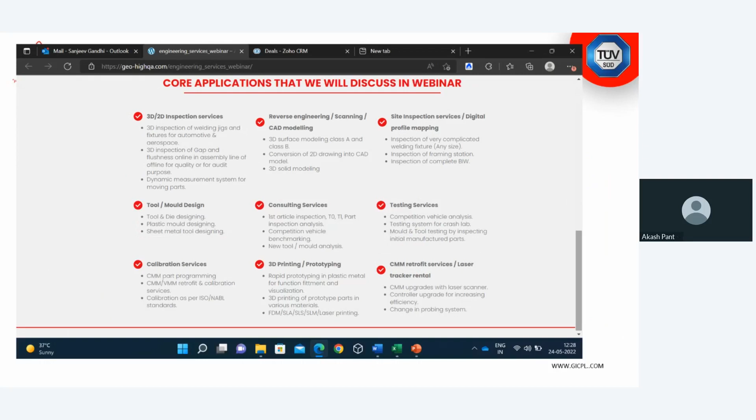Now let us come to the core. When we say technology, can we do these kind of things with the help of conventional methods? Answer is not at all. So these technologies come from, unfortunately or fortunately whatever word you want to use, not from India. This all comes from abroad.

When we talk about technology like vision system, we directly go to US - this is a company from US called MicroVu, almost 75 years old. When we talk about 3D scanner, we go to Germany, a very old company. When we talk about handheld scanner, we jump to Germany, Wenzel. When we talk about quality inspection system, another US company, High QA. Do not worry about too many technologies right now.

What I want to give as a message here is in these two slides - whatever engineering services we are doing with the help of these technologies. So we have vision systems, we have scanners, we have quality inspection systems, we have gap and flush measuring systems, we have seal gap measuring systems, we have laser trackers, we have portable arms, we have gear testing systems, we have another portable arm for medium size, we have surface metrology systems, we do have shop floor measuring systems, and last but not the least, something we are proud of - using all these technologies, we are making something in India which we call customized machines.

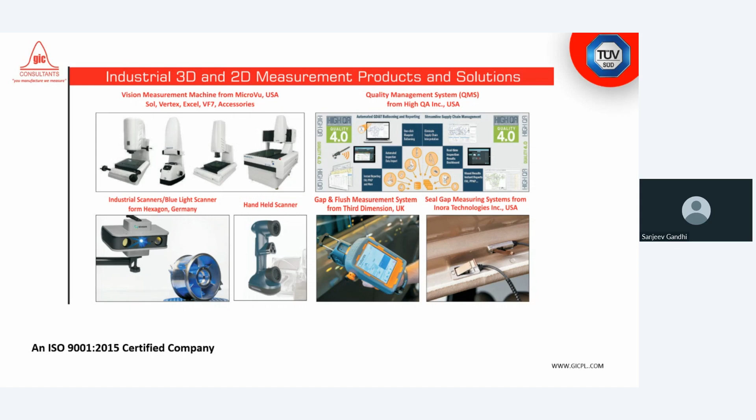Did we miss anything in these two slides? We are talking about portable, we are talking about tracker, we are talking about vision system, we are talking about surface metrology, gear testing. Did we miss anything? I will say geoinformatics is a one-stop solution, but still we are not having 100% solutions for every problem - this is an opportunity as well for us. We always aspire to give the solution for everything. But today, in today's scenario, we claim that at least 90 to 95% of your measurement can be done in-house, within our company.

I'm just now putting down all this equipment by name and by country, which we just spoke about. Again, do not worry too much, but keep this message in mind.

When you go to, let's say, a specialty hospital, let's say any hospital, there you do not go only for simple things. There you go for complicated challenges. Same with geoinformatics. Here you do not come for a simple thing. Here you will be coming for complicated things, for things which are not generally available everywhere.

High precision vision video measuring systems for very, very small part measurement, we do it. We do ballooning of the drawings. We do quality management systems with the help of High QA software. We do gap and flushness for two-wheelers and four-wheelers in our country.

We do seal and gap measurement systems. We do flexible gauging. We do portable, blue light scanning, handheld scanning. We do shop floor measurement. We do very large part measurement using laser tracker.

When we put 'very' in a longer way, I mean 100-meter kind of parts. When we say very small part, we are talking about even a stent, a needle. So as you see in our theme also, from the tip of the needle to the aircraft.

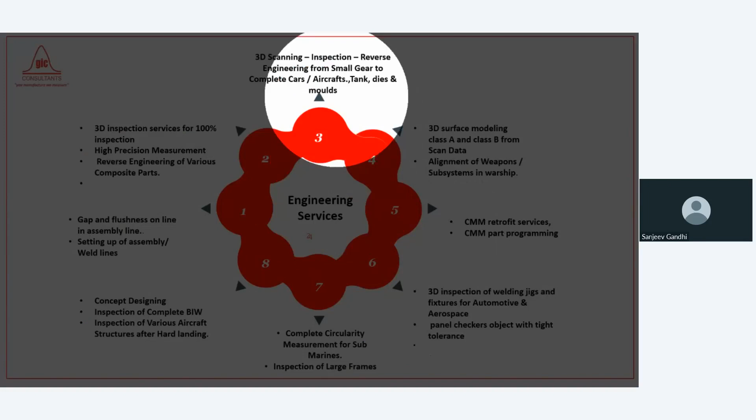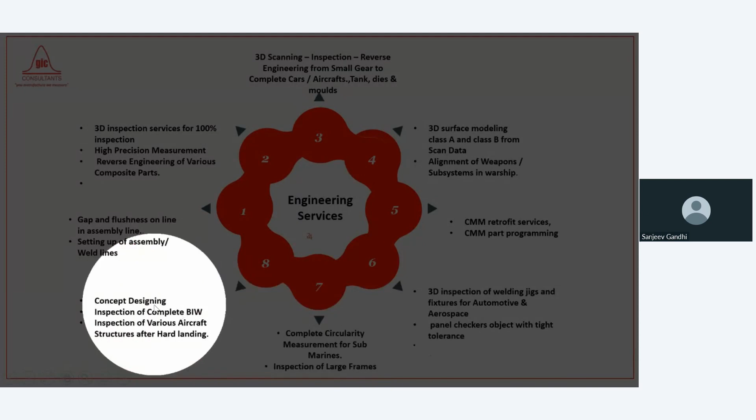Now, talking is easy, but giving a solution is not easy. Let us focus now on engineering services. When we say services, it can be a simple inspection of an automotive tank or a two-wheeler brake, or it can be a very complex warship where we have to do class A modeling, or a small welding jig where we have to do alignment, or circularity measurement, or designing. You want to redesign something within the country, or inspection of the weld lines, and last but not least, measuring something 100% before you ship to your customer. So this is a whole cycle, and Geoinformatics has a complete solution.

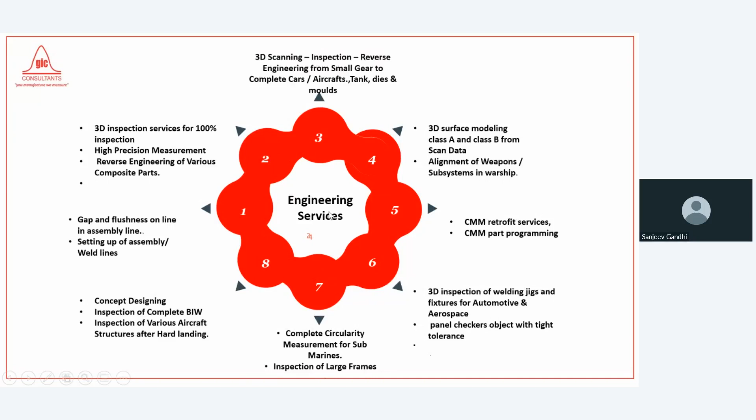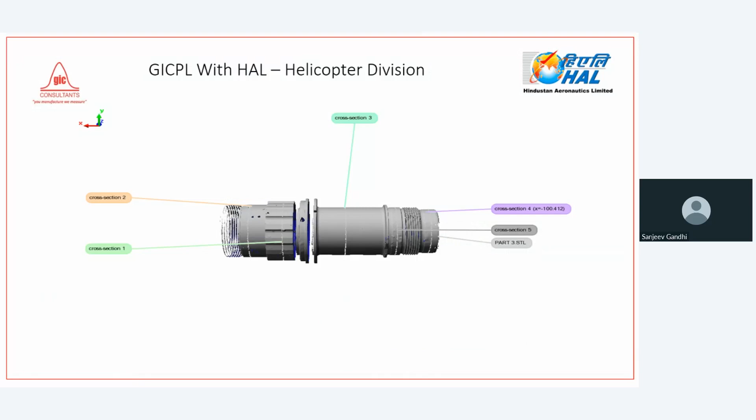This is another small part, and we are trying to measure the dimensions using a scanner. I was showing you before aircraft and missiles and all that. Now you see here is a car, here is a truck chassis, here is a fixture, this is a Scorpio chassis.

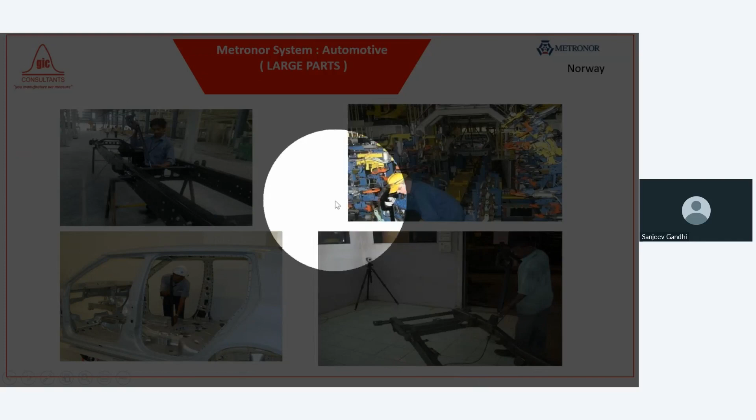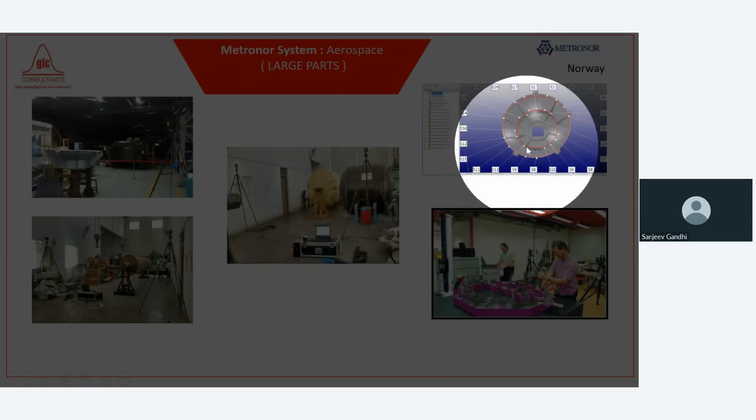Again, the machines are the same, the concepts are the same, but the people who do the measurement are different. They are from different companies, different organizations. Here we are talking about large parts, whether it's a fixture or an antenna like this kind, or a big shell, or energy parts, whether it's a turbine blade, or a JCB bucket holder, or a water turbine, or a windmill hub. These are all the same.

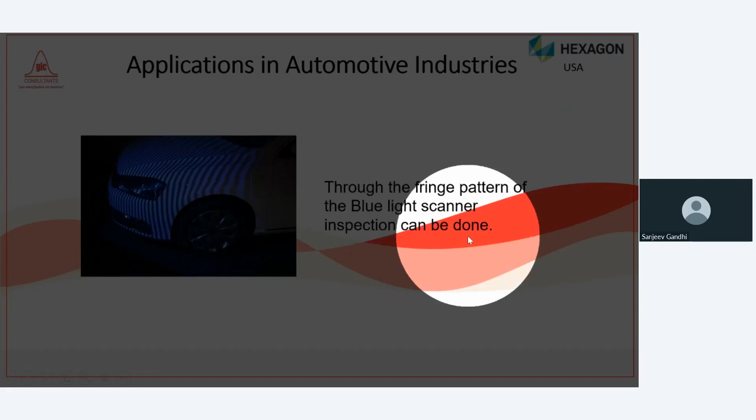Here we are talking about scanning. As I said, we will surely be covering each and everything. I'm just giving you the flavor of the machines which we have, so that you understand when we talk about scanning, we are capturing using a fringe projection technique, the complete part, whether it's a gear or a knuckle, or again, a turbine.

When we talk about such parts which are used parts, because you will not be having all new parts, some parts are going to be used parts. So we are able to measure the used parts and make a drawing out of that. This was a used part from some customer. After measurement, we made a CAD, and from the CAD we made the drawing.

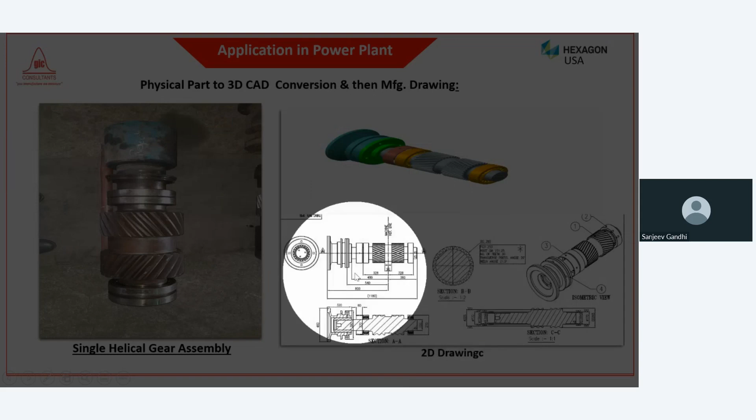Another equipment which we call a Romer arm, meant for larger parts. This is a tactile touch method, as opposed to a non-contact method.

I will be switching into some videos just to ensure my talking doesn't make you sleep. So let me first show you the equipment which we call a blue light scanner, because scanning is everything in terms of capturing very precise parts.

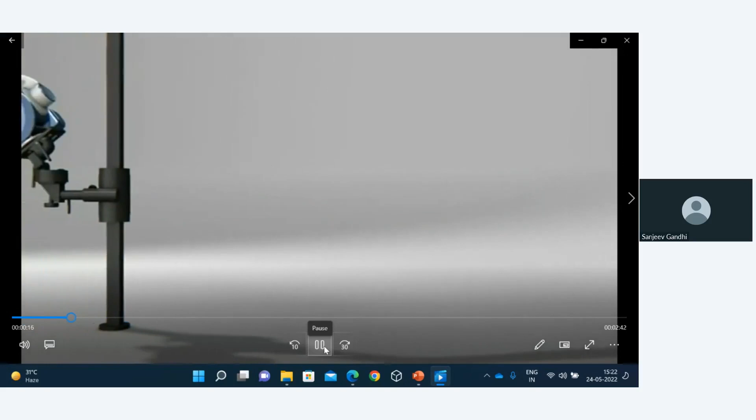Recheck whether my video is now getting displayed. My video is getting displayed. Someone can reply - sir, your screen is visible but video is not playing. Video is not playing, hold on then. How about now? Yes sir, it is visible. Can you play it? Yep. Is it playing now? Yes. Yes sir, it is playing. Okay.

This is the physical part which we want to measure for inspection, or let us say, for reverse engineering. So the first step is we need to scan this.

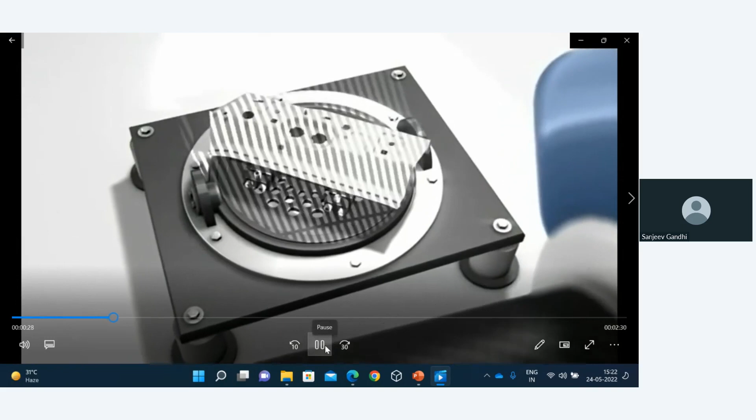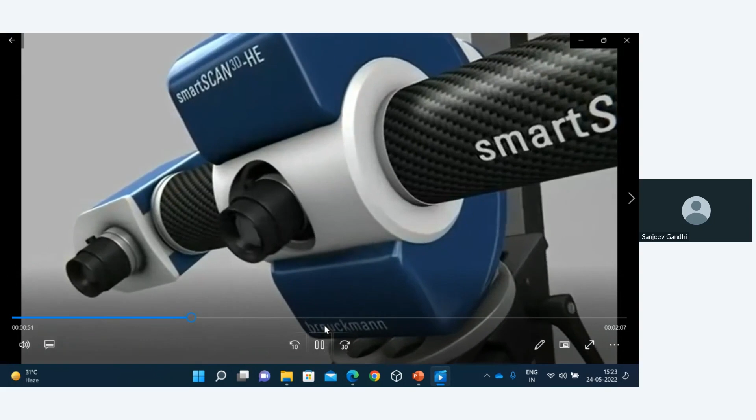So what scanning is happening now? This is a scanner. Do not worry how the scanner looks and all, but keep in mind the scanner's job is to scan the physical object and give you the 3D scan data. It takes a couple of minutes depending on the size of the part.

Now what you see is nothing but scan data. This is not a CAD model, this is scan data. Each and every dimension has been captured in this machine now.

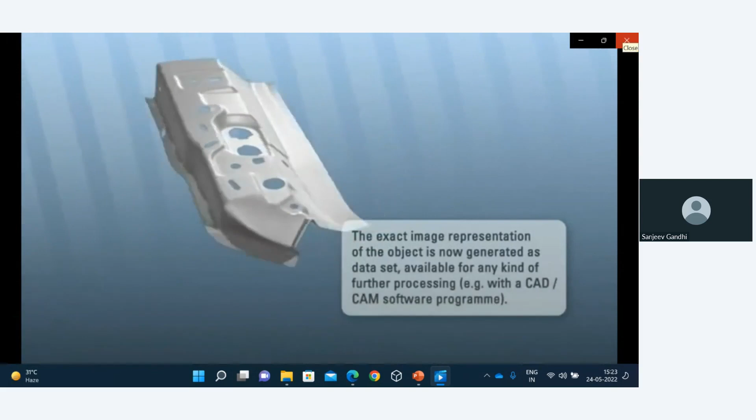So let us now show you what else we do when we scan it. I'm going to show you now some real thing. As I told you, I'll be showing you clear data.

Once the scanning is done, what we do - I hope now my report is also visible. Yes sir, it is visible. We need to keep checking. Visible? Yes, it is visible.

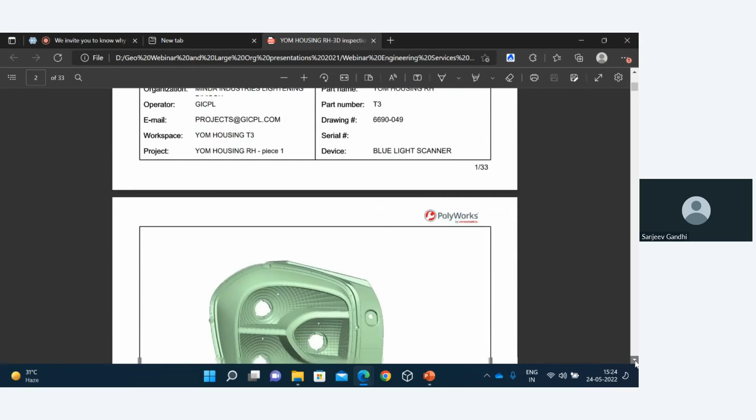Okay, once scanning is done, let us say this was the scan data. If you see here, this is the scan data, and here is my CAD data. With the help of software, we do the first alignment.

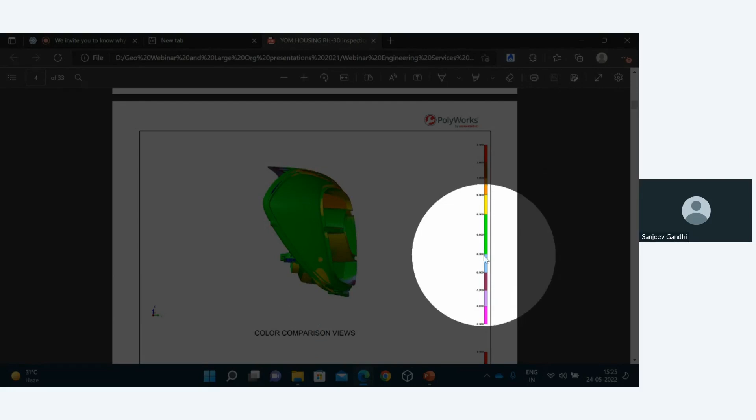Once alignment is done, immediately you have this kind of output, which we call a color comparison report. It clearly tells you, with respect to the tolerance, what kind of accuracy we have achieved. For example, plus minus 0.5 is the tolerance here. So wherever there is a green color, we are showing that this is within the tolerance. Wherever there is a color like red, we are able to give you the tolerance of, let us say, plus minus 2.5 millimeters onwards.

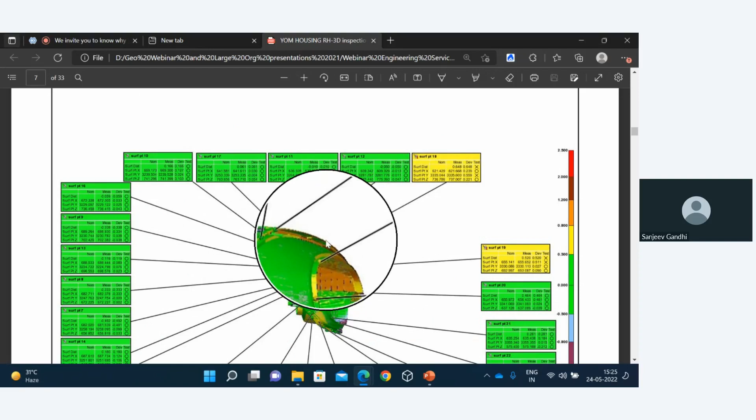And if I just take you down various views, this is one of the views where you are able to capture very clearly what kind of accuracy I'm getting. So you are able to take a decision whether to rework your tool or whether to accept your tool. If there is a tolerance of plus minus 0.5 in this case, whether you are accepting it or not, you are able to take certain decisions.

Do not worry about pass/fail - this only tells you that a lot of dimensions will be out of tolerance, some dimension will be within tolerance. So like this, you will be checking your part fully. And at the very end - I'm just jumping to the very end - the system will tell you this particular thing, which means how many percentage of my part is within plus minus tolerance, and how much, like this, was a bad part - 0.6 percentage is my bad part. So it all depends what we want to show.

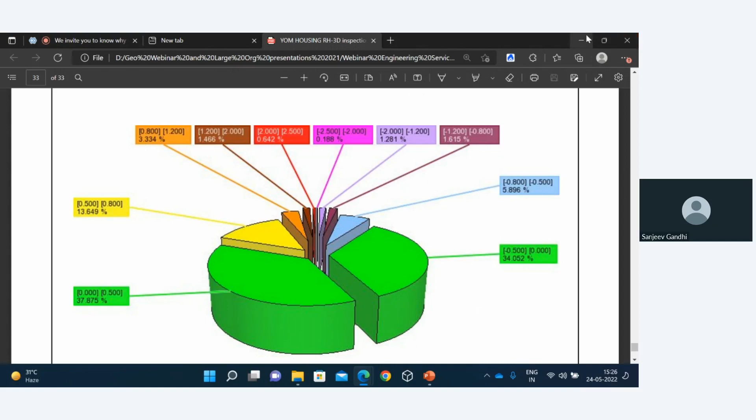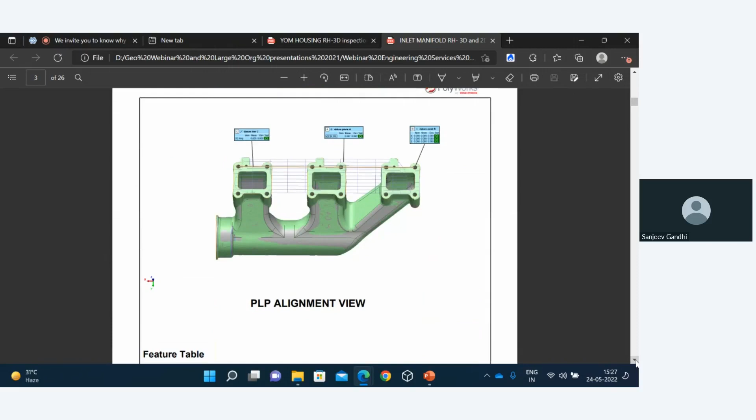So this is called 3D inspection. But my job is not only to do 3D inspection, we also want to do 2D inspection, layout inspection. For example, another case I'm showing you - this was an inlet manifold. Again, scan data, CAD data, you combine together, and here is my 2D inspection report.

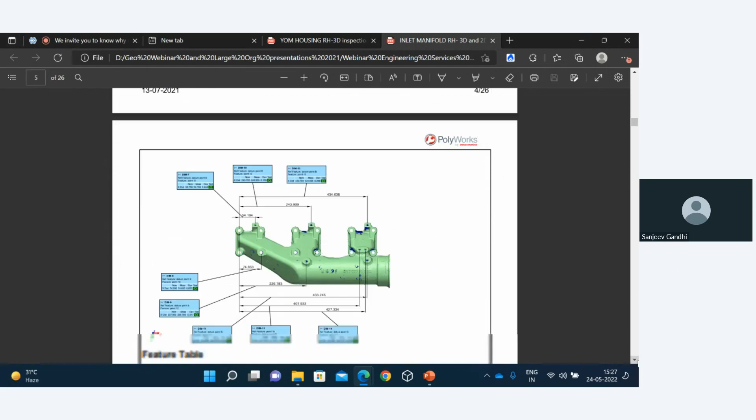You see, I am able to check dimensions like the distance between this hole to this reference - this is my reference line. We are able to capture all these dimensions. This is what you do with the help of CMM or portable CMM or anything. So we are able to check the dimensions very properly, depending on your tolerance, with the help of the same scan data. Here is another view of the report.

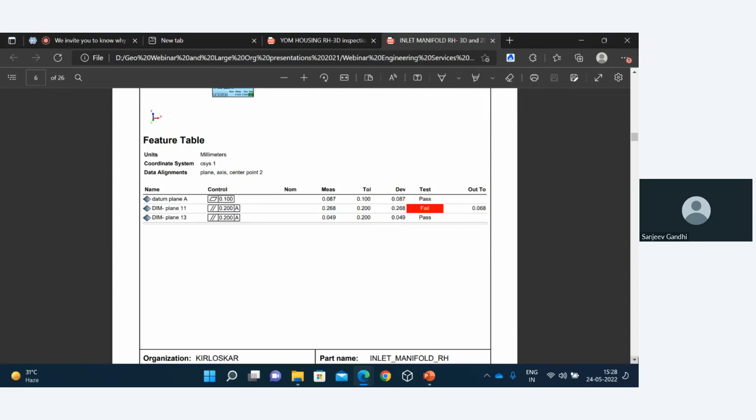If you see here, what are these? Of course, I am able to calculate the flatness, parallelism with respect to datum, my measured values, my tolerances. So GD&T is very much part and parcel of the measurement. You are not measuring only the linear dimension, you are also measuring GD&T.

How about the cut section? Not physically cutting the part, but taking the cross section of the data and measuring certain cross sections. Very much part of the system. All other cross sections. Some kind of CAD we are trying to measure the distance, the hole distance.

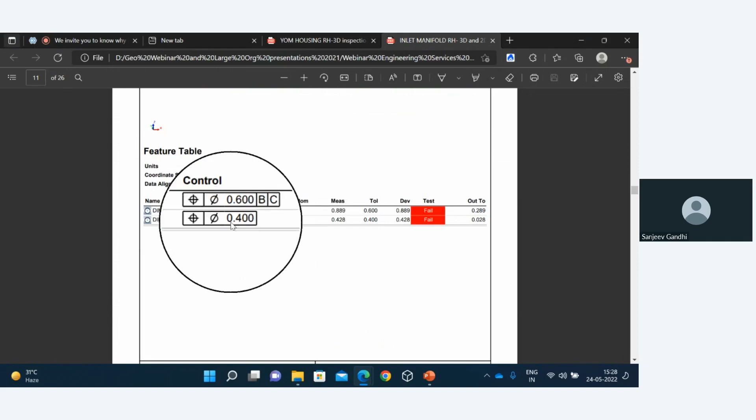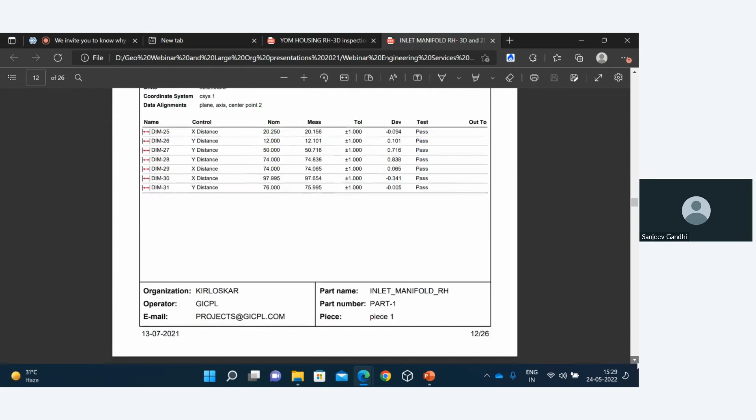The reason I'm showing you all this, most of you know very well layout inspection. Using a CMM, you also find the position with respect to datum B and C. And again, the product fails here because of tolerance. Here the tolerance given by the customer is this one. Again cross section I'm trying to show, etc.

So we will stop here in terms of inspection using scanner. What does scanner do? Scanner can also do reverse engineering.

So I am opening this file. I again will check whether I am still visible or not. Yes sir, you are visible.

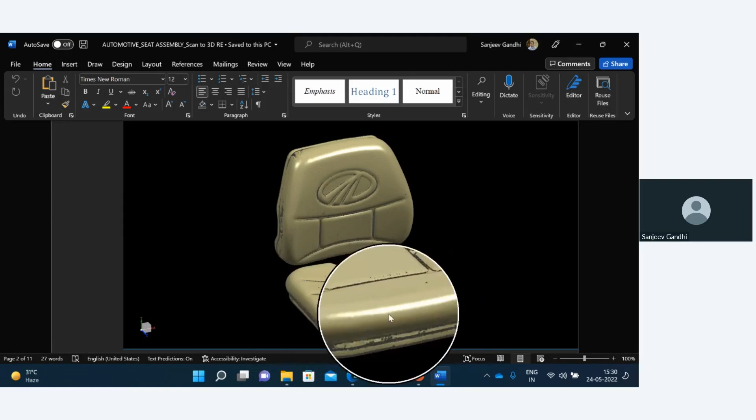Now this is an automotive seat. Again, I'm saying whether it's an automotive seat or anything, just imagine whatever object you are having, we will be able to scan this. This is a scan data. You can see this is not a CAD model, this is a scan data. People who have seen scan data before know how to read it.

Why am I showing you different views? Because it's a 3D, you are not making 2D. This is a 3D. Everything in today's world, we are talking about the 3D domain. If you see here, this is our back where we put our back, and this is of course the seat.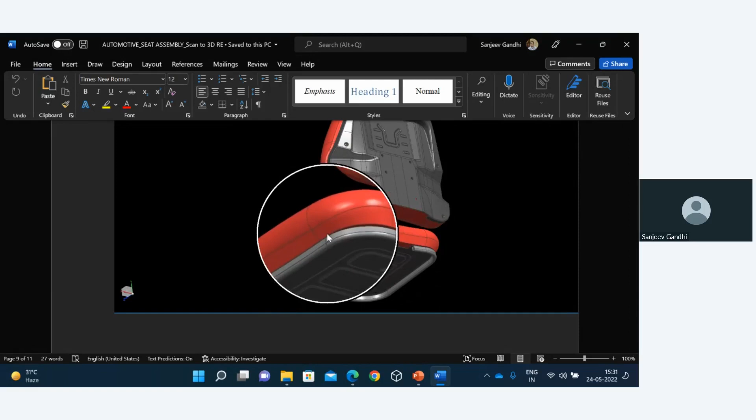And here we see the complete CAD model. How do you differentiate the CAD model? You see surfaces, you see these boundaries, black color lines. So you are able to see the complete surfaces.

So what else can we do with the help of scanner? Again, reverse engineering and inspection are the two major activities. I'm showing you now a lot of parts just as a glance through.

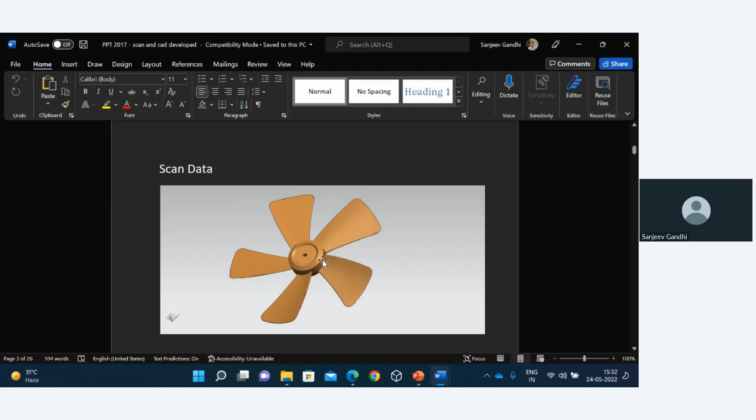Fan, you must be wondering why this kind of fan? This is not an ordinary fan, this is a fan for a blower. Some customer wants to reduce the weight. There is an existing fan, you want to reduce the weight without reducing the efficiency of the fan. What will you do? You will scan this, make a CAD model, do some calculation, change of thickness, maybe change of material, and try to handle the challenge at hand.

Once you have a CAD, it is very much required for such kind of things. Some bracket, CAD model, scan data, some other part. Just a glance through, I'll stop a second here.

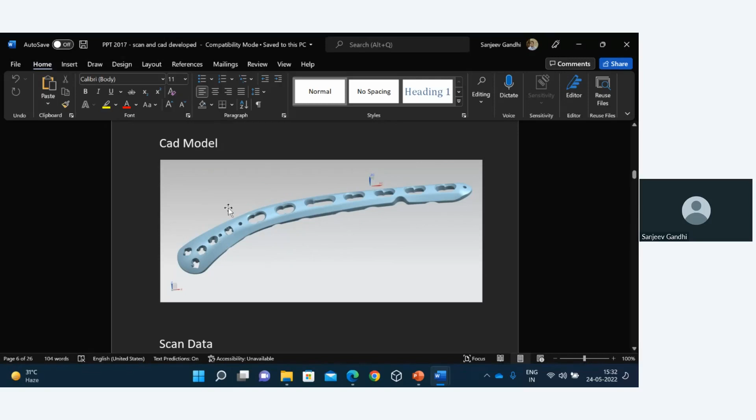What is this? This is a bone plate, a medical application. Why do they want to scan it? Because all of us have different size of bones, different shape of bones. We need to have certain customized plates. God forbid if you fall down, or if you have to put a plate in to protect or do certain surgery.

What is that? Some kind of object again. I'll be just moving fast. Some light part, some die, many parts. What is that?

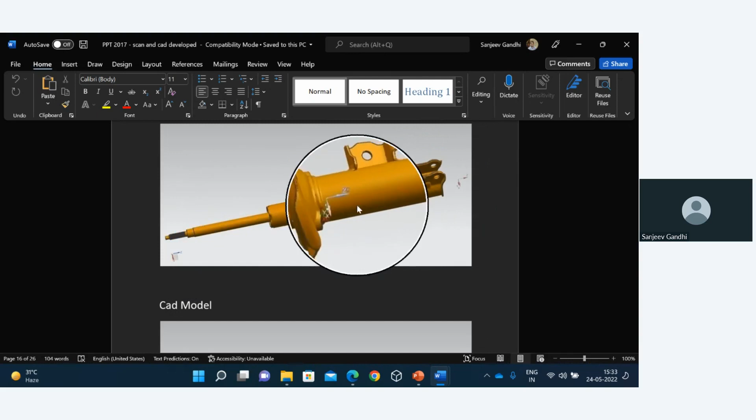This is a shocker for the car. And if you see here, this has a child part. Some customers want to scan the whole assembly and give them the child part separately. Absolutely no problem, this is what we do as part of service. This is a CAD model of the same shocker.

I have plenty to show, but time is always a constraint, so we'll follow the time. What is that?

Now I have a question, of course you need not to answer, let me use this question to move ahead. Whatever you do with the help of scanner, it was meant for medium sized parts. Whatever part you have seen, it was a couple of centimeters. But let us say I have a part which is only 2 millimeter, 5 millimeter, very small part. Do we have that kind of parts?

Answer is yes. For example, a stent which goes to the heart, or a very small tool which you have to measure. What will we do with that? We will be using a different technology. So I'm showing you another video, very quick one, where you are going to see how these small parts are getting measured.

I'll be again checking whether my video is getting played again or not. Yes sir, it is visible. You can just play it.

Okay, as I said, we have a scanner. Now we are talking about a high precision vision system from Micro-Vu USA. This is a screw, very small screw, fitted on a rotary chuck. Let's see how we measure it. This is a vision system, which is a shadowgraphy based system, and with the help of that we are able to measure.

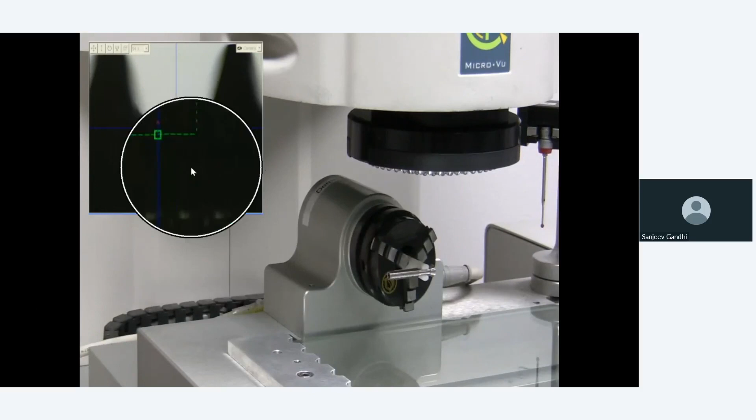Of course this is rotary, rotary is rotating the part, and here you are seeing the complete screw getting measured. By the way these dimensions are very, very small, and precision required is in microns.

See this profile, now the chuck has rotated the part vertically so that we are able to see the top view. Now the bottom view.

And finally we get to an important point. End of the day, you are not measuring one part and then being happy for that, you have to measure a lot. Sometimes you have to measure a sample, and after measuring the sample you need to have a complete SPC. How much was the total failure rate? How much was the chi square? How much was the CPK? All these values we are able to give to you in a very short period as a final output.

Another video I'm showing you. The message here is, whether you have any physical part, Geo Informatics can give you engineering services to measure that.

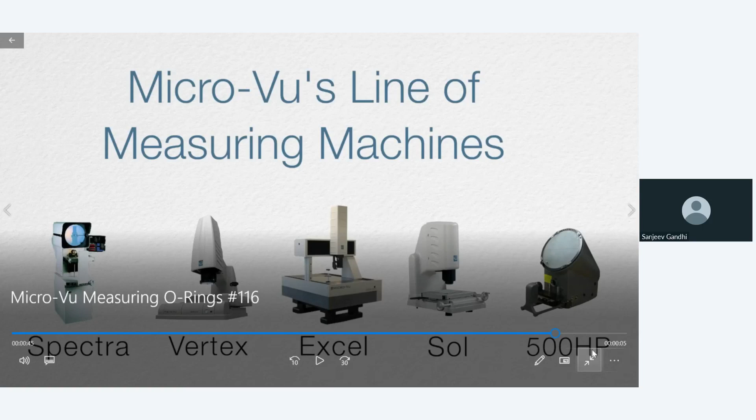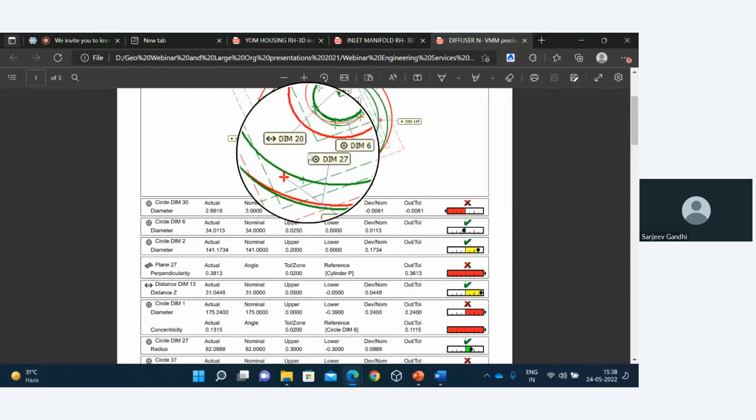So nominal versus actual, and you get a complete measured sketch for the same part. And here you get the complete report, and you can see as a manager whether the part is overall okay or not. To me this part is not okay, because most of the dimensions are out of tolerance, red, red, red, you are able to see. So what do you have to do?

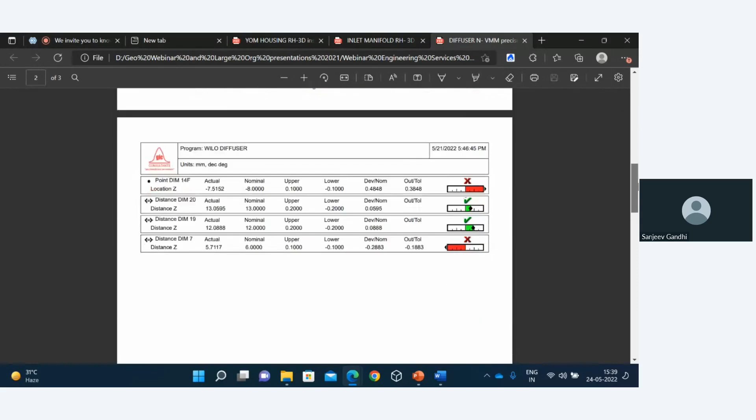You have to correct your tool. You are not measuring the tool here, you are measuring the part here. So end of the day, the part is output of a tool, so you may need to correct this tool.

What will we do now? We spoke about scanner, we spoke about vision system. Now let us say I mentioned very small part, medium sized part, let us say very large part. What is a very large part? Let us try to see that.

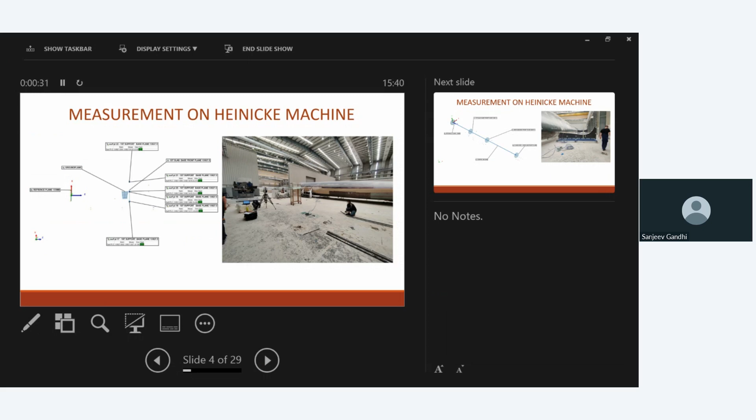Is it a large part or not? This one is a windmill, 70 meters large. You can see the part here - this red area, I'm putting my pointer on it. Very large part. This is a machine called a laser tracker. The floor is covered with a special compound, not rust or dust. This machine is measuring this large part. So that was the theme: from a very small part to a large part, we are able to measure all sorts of parts.

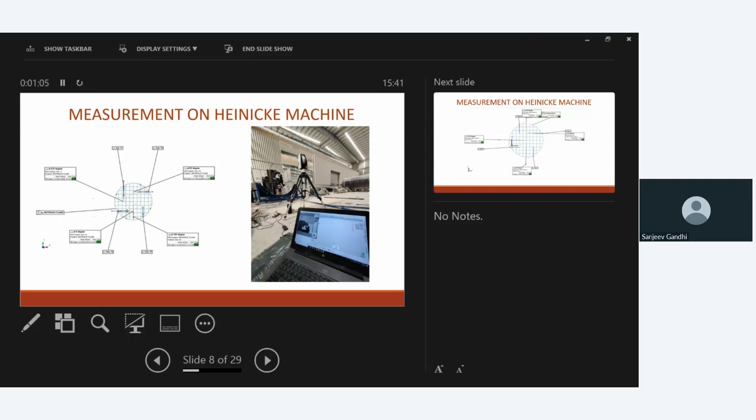One of our engineers is trying to measure a very large part, and the machine is different. Before, I was talking about the scanner, then about the vision system, and now I'm talking to you about the laser tracker, again from a company called Leica. It's a Swiss company, now taken over by Hexagon, so this is a Hexagon product.

What we are measuring is nominal versus actual value. Our job is to give you actual values compared to nominal, all the complete values we are able to give you. See how the large part looks - this is the windmill, a large 70-meter windmill.

You can see this engineer of ours trying to measure these PCDs. If you see one of the holes here, the flatness is very important, and this PCD is very important. This gentleman is carrying a probe in his hand. I'm not sure whether I'm able to zoom in.

Akash, when I use this pointer, is it zooming in or not? Sir, it is not getting zoomed. Sorry? Sir, it is not getting zoomed. You can just zoom it with control. Your voice is not coming. Never mind, so we are showing you all these things.

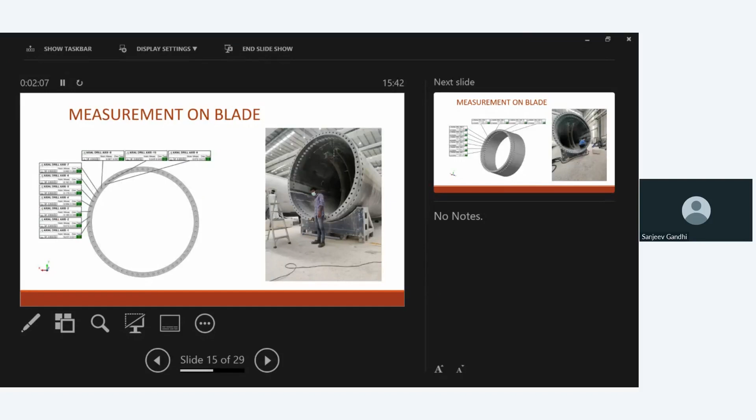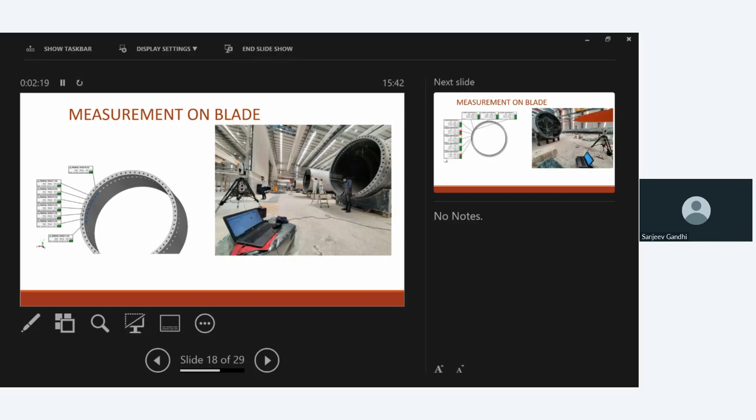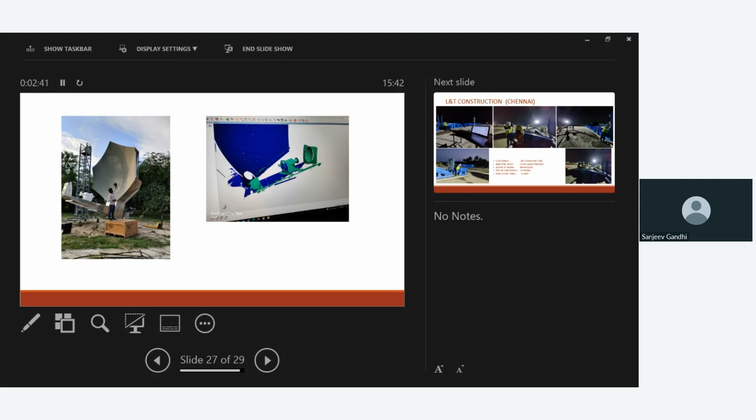So the message is: our company is able to measure all sorts of such large and small parts.

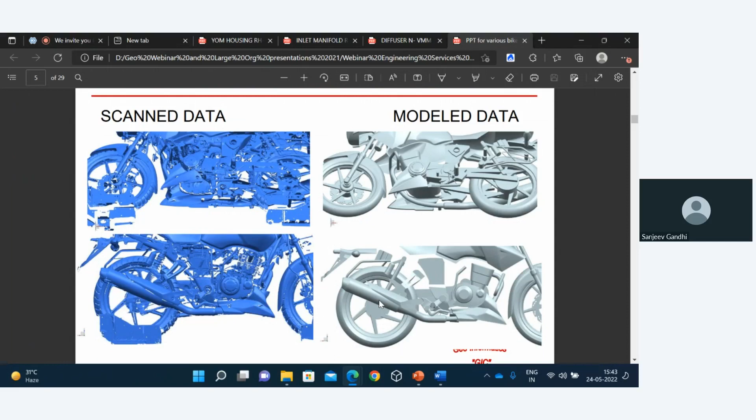Now I'll show you a couple of quick things. Here is a bike, scanned of course - this is a two-wheeler. Whether it's a two-wheeler or three-wheeler, why do people get it scanned? Because they want to make sure their vehicle is launched with a full dimensional check, and if they have any challenges in the proto vehicle itself, they are able to handle that.

So we are able to handle such kinds of projects - all such projects are our services. Whatever I'm showing you are real projects, without naming the customers, but all of us know Geoinformatics clearly says: pick up any bike, pick up any car, pick up any vehicle - Geoinformatics has some stamp over it. Whether it's a very small work or some large work, we have done something or the other.

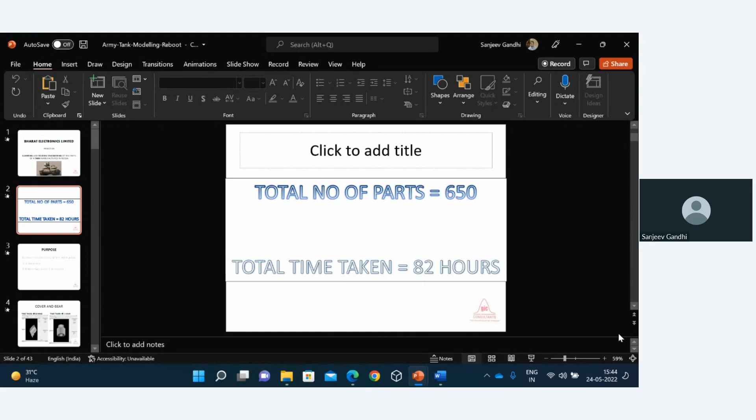Another small example I'm showing you - a tank, 650 parts, 82 hours. It was reverse engineering of a tank, modeling in 2D - all these are the parts we measured, scanned, and these are the hours, all that. We are talking about scanning time.

Now I'm going to show you very quickly my presentation. I'm coming back to where I left off, just to show you.

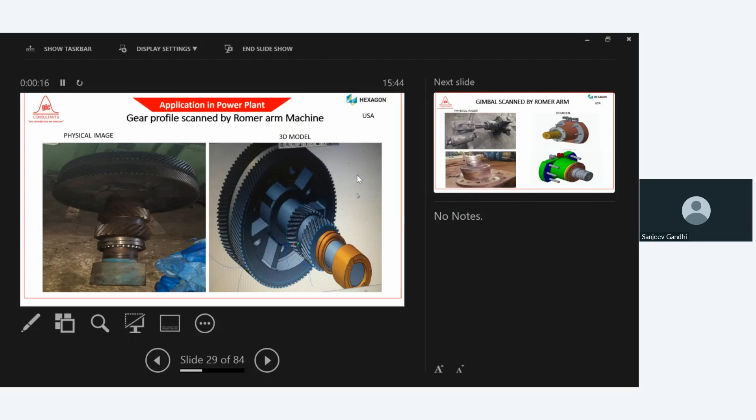How about measuring a gear? Can you measure a gear with the help of a vernier caliper or a general knob instrument? The answer is no, we have to use some kind of technology - we are using a Romer arm for that. We are making drawings for that - we make a sketch or very rough art and then make a drawing. We use all such kinds of machines.

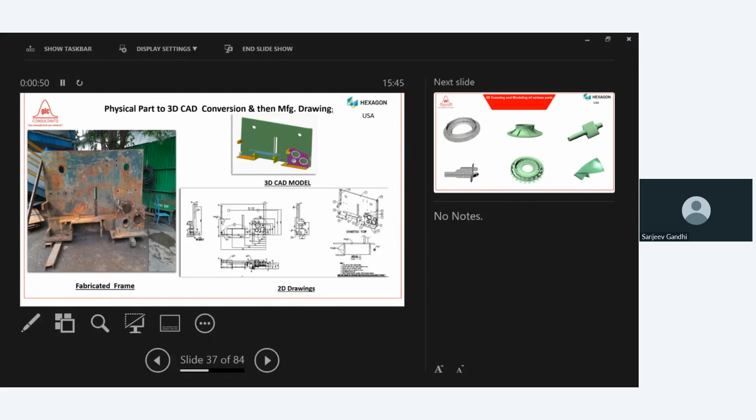Sometimes we need to cut a part - this part has been cut to capture the inside cooling channels. So after cutting, how do we align the data? Simple - we use common points before cutting and after cutting, and try to measure such kinds of parts.

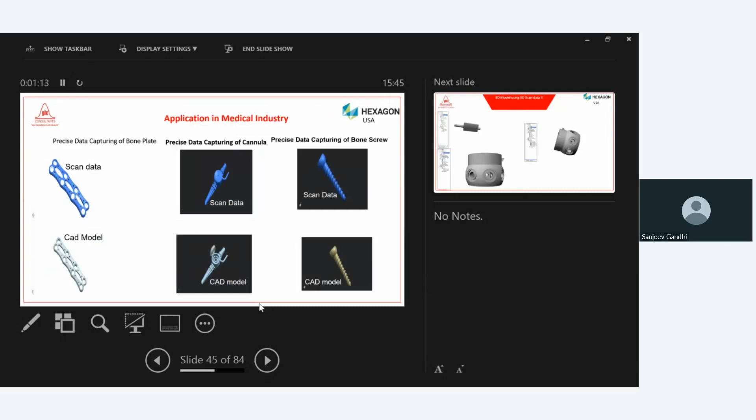We work in the medical industry as well, and the electronic industry.

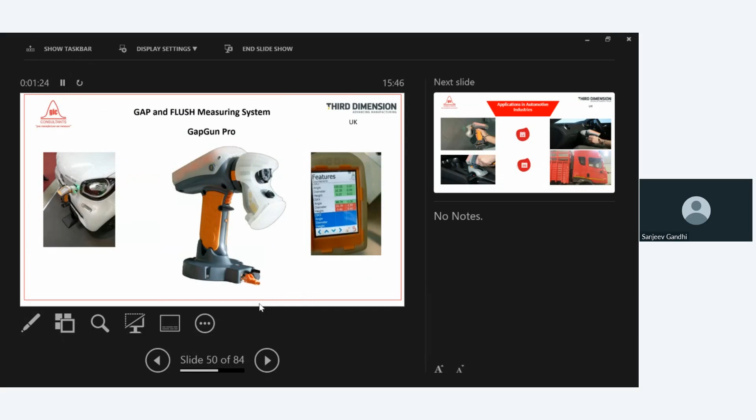Gap and flush is also a very important tool. Whether it's a two-wheeler or a four-wheeler, there will always be gap and flush, so we are able to capture these gaps and use that.

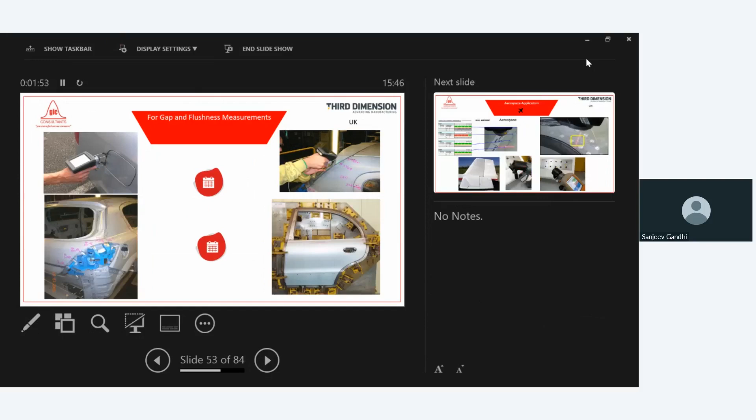These are some of the pictures I'm showing you for gap and flush. We discussed about Micro-Vu already. So in short, geoinformatics provides all such kind of technologies to handle these services.

Akash, I want to take some questions. So if there's any... I have a question from Gyanendra Bhushan sir. He's asking, is GIC NABL accredited?

A very important question, because when we claim we are able to measure very precise parts for medical, for aerospace, we need to be qualified, we need to be accredited. So geoinformatics right now is ISO 9001 certified, and NABL accreditation is on. Everyone knows NABL is a bit complicated process, takes about 6 months. So we are not yet NABL certified, but NABL accreditation is in process. We have applied, audits are still to be happening, we are putting the system in place. By July end, we will be NABL certified as well. Till that time, we are using all our artifacts, all our gadgets for calibration and measurement through a NABL certified lab only.

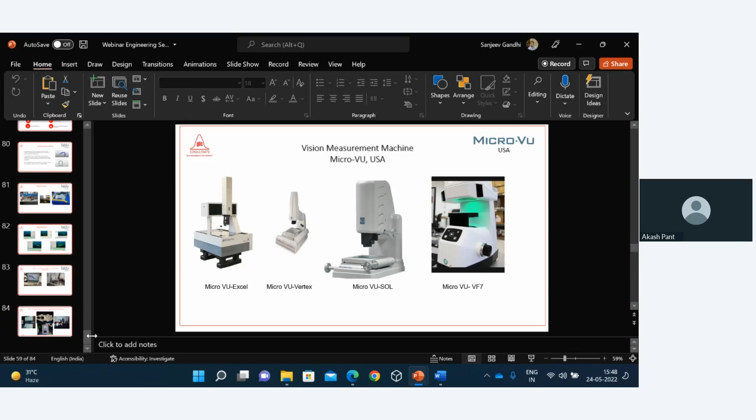This is a little bit of a question, let me answer this way. The birth of the handheld system was in Canada. Of course, Creaform was the first company who started the handheld system, but later all the handheld systems went into China. But our company, Geoinformatics, recently associated with Wenzel, Germany, and that is what we have started now. This scanner is from Wenzel, Germany.

Here is another question from Venkana sir. He's asking, can we scan threads and 3D print them? You mean threads? Right, threads. Not so easy, I think you know thread printing is not so easy. Why? Because 3D printing, unfortunately, cannot give you a point size of less than 0.1 mm.

And threads are very precise, so making that thread in 3D printing, I will not say impossible, but not so easy. Geoinformatics, I will tell you about one project which had a thread. How do we handle the thread challenge? We do not print the thread, we do vacuum casting as well. It's a mix of 3D printing and conventional processing to do such kind of challenging things. Threads overall are not very easy with 3D printing.

I think this is the answer. We have another question from Mr. Swapnil, he's asking, can we scan cylinder block, cylinder head? Yes, right sir, cylinder block and cylinder head, very much. In fact, by chance I had this image, which was a cylinder head only.

So Geoinformatics does cylinder head, cylinder block, even the dies for that. Even the cores, sand cores, complete engineering activity of the cylinder heads we are able to handle in-house. Cylinder head, cylinder block, cores, sand cores, all these we are able to measure using 3D scanner. 3D scanner is the right technology for cylinder heads.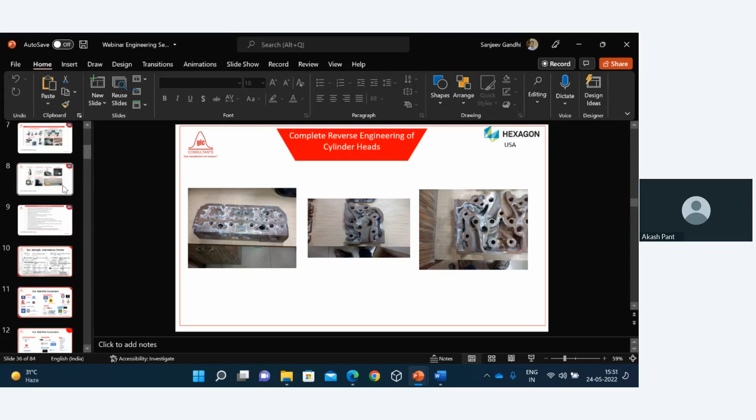Okay, I think they got the answer. Yes, so Swapnil sir got the answer. So sir, we can continue because we don't have any more questions for now.

Okay, now I want to just show you one more video to give you one message. Give me a second.

What is that message? Slowly, technology is moving into inline inspection. Whatever we spoke today is standard room inspection, but standard room inspection is getting converted into inline inspection. So let us try to see this video.

My video has come up now on your screen. Yes, sir, it is coming up. You can play it.

What do they do now? They want to measure the part in the line. They don't have time. No one has time to do post-mortem, which means you produce a part, bring the part to the standard room, and then start measuring. They want to measure, meaning our customers want to measure all the parts in the manufacturing line itself.

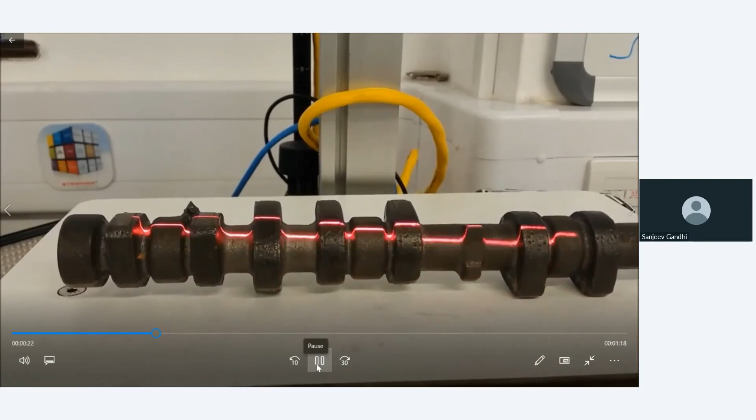This is the measuring in the line. Of course, this is just an example we are showing. Here you see now the data, and these are parameters. Let me show you the parameters. Here are the parameters - what is the gap, what is the flush - total we are able to see.

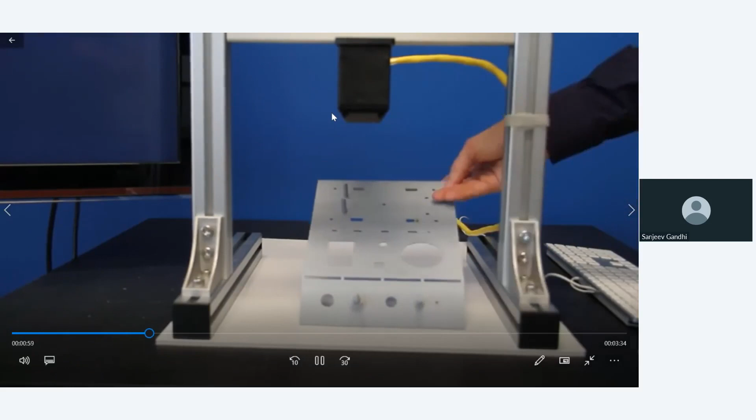One more thing I would like to show, just to give a message that Geoinformatics is very much into automation as well. Automation means we can automate your measurement processes. This is what the message is. Whatever you have, whether this is from A competition or B competition, A brand or B brand, we will be able to automate your complete processes.

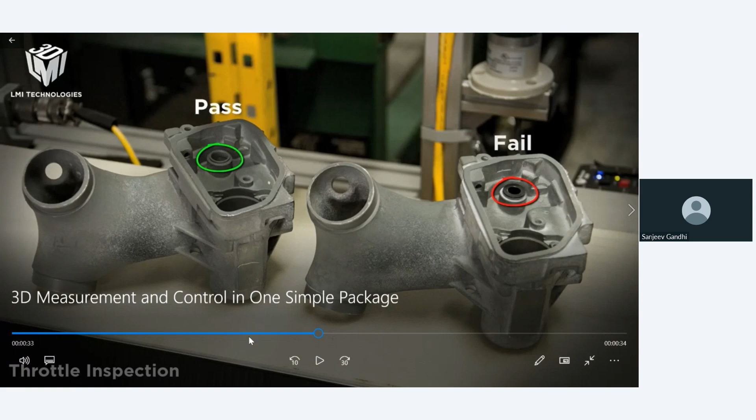Example - this is a real life case without naming a customer. They are producing in hundreds, and this nozzle is very important. I'll just mark that.

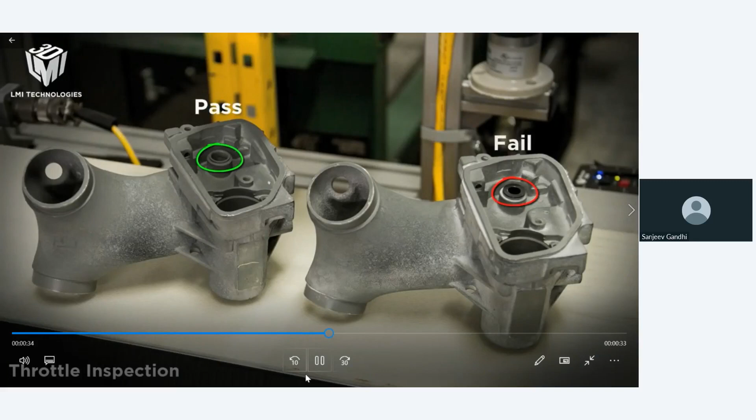This is a part which will pass through on the conveyor, stop for a second, and immediately this indicator - red and yellow, red and green - will tell you whether to keep the part on the line or take it away. Because this part, this red color thing, shouldn't go to the assembly line now. If you stop for a second - green, go next, like this. This is what people are looking for now. We call this the automation of your measuring domains.

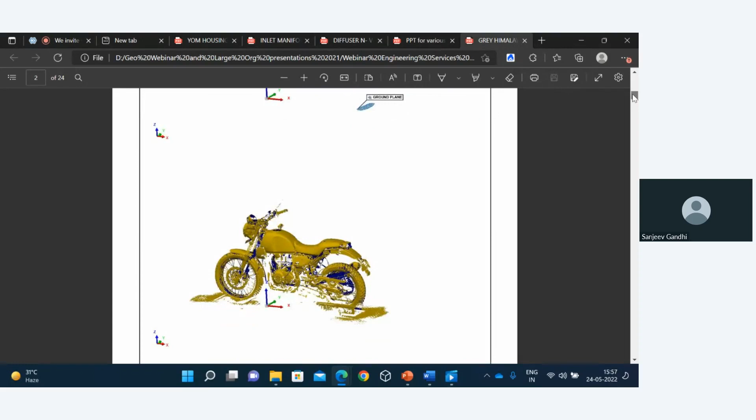I will also show you a couple of more things, example, till the time I have a couple more minutes. Just to give you an example, some customer comes to us, they will give us a product, for example, and they want us to check the symmetry.

Hello sir, your voice is breaking. Sorry, my voice is breaking. Still it's breaking. Is it okay now? Akash, is it okay now? Yes sir, it is okay now. Okay, so...

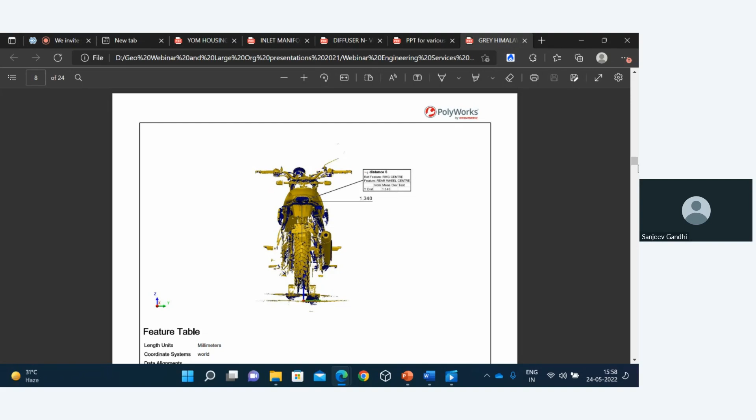Now it's okay. Now in this, we are checking the complete symmetry of the object. So the customer is not asking for a dimensional report. They are asking us - here is a problem, we are launching a product, we want to check whether it is symmetric or not.

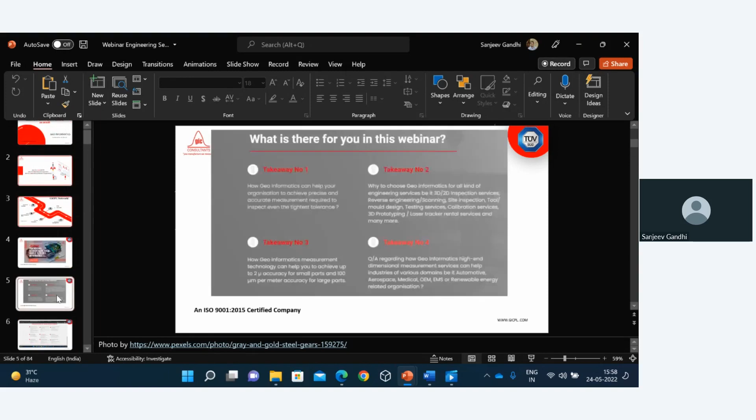Okay, so I want to conclude, as I said, I will show you the takeaways. I hope we could cover the takeaways or not. The first takeaway was how Geoinformatics can help your organization achieve precise and accurate measurement. I told you Geoinformatics has all sorts of equipment - CMM, VMM, scanners, gear-based testing, surface metrology, laser scanner and handheld scanner and all that. So come to us, we will be able to give you a solution irrespective of accuracy and size.

Takeaway number 2 was engineering services - whether it's 3D, 2D, reverse engineering, tool or mold design, testing services, calibration services, prototyping, laser tracker rental. Yes, I did not speak too much on rapid prototyping or 3D prototyping because for 3D prototyping, I will say we have limited services. We do not have everything.

But rest everything we have. Takeaway number 3: how geoinformatics measurement technology can help you achieve 2 micron accuracy to 100 micron per meter. We are able to use 2 micron using vision system. If you remember, we showed you MicroVu and 100 micron per meter and all, and we showed you the very large aircraft as well as the windmill.

Takeaway number 4 was quality assurance, regarding how geoinformatics high-end dimensional measurement services can help industries of various domains, whether it is automotive, aerospace, medical, OEM. Again, I'm repeating, both of you in today's webinar are from different industries. I can see automotive, EMS, electronics, medical, aerospace. So it does not matter to geoinformatics what the part is. What matters is the size of the part, the tolerance of the part, and what you are looking for. Only these 3 things are required. Rest is all ours, rest we are able to handle.

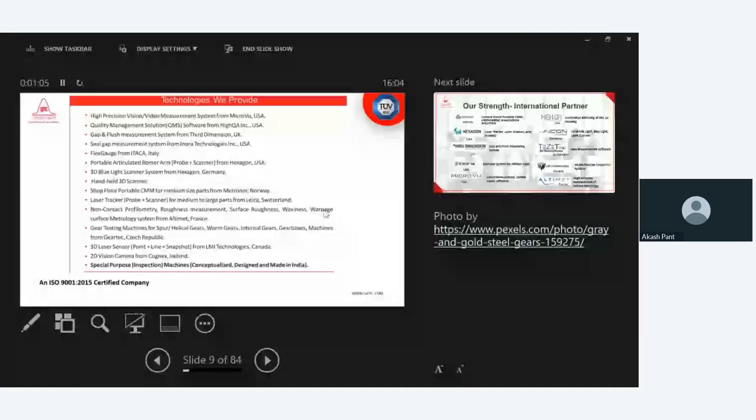Since we do services ourselves, ma'am, you can surely buy products as well as services. Sir, you are not audible. Now I'm audible? Yes sir, you are audible now. The last message was not coming. I just said sale of the equipment. As I said, as my screen also shows, if it is still visible...

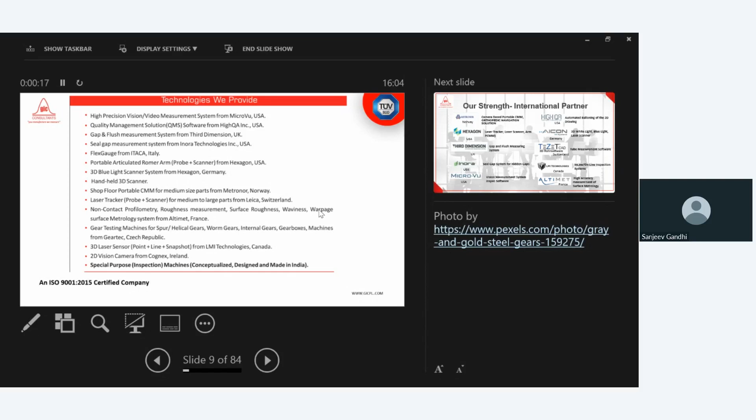We sell these machines, we surely sell vision systems, scanners, everything mentioned on this slide from top to bottom. We are selling these machines as well because, as I said, these are our partners. We sell machines for MicroVu, we sell third dimension for gap and flush. From Hexagon we sell scanners, we sell sensors for inline measurement from LMI, we sell ballooning software and QMS software from High QA. All our partners. So we do sell.

What to do? A joystick is like a toy. Without naming a company, I will tell you one engineer was using the joystick very roughly, like you use a PS2 or PS3, but a joystick should be used very carefully. So if it has gone bad and it is under warranty, it will surely be replaced. Otherwise, generally a joystick doesn't go bad.

There's only a pendant, a circular kind of thing, which moves in the X, Y, or Z direction. That can be changed. So if they can give us the company name, we can quickly ask our existing customer management department, ECM people, Rishabh.

They will take care of it. Akash, take the sir's name and number so we are able to support them quickly. Yes, sir, definitely. So these are all the questions.

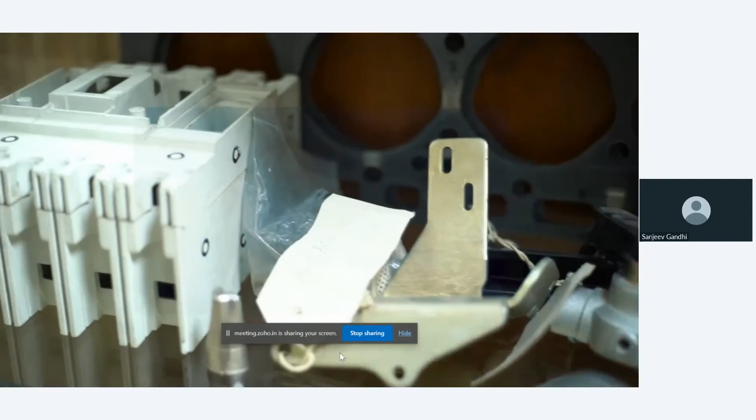I just want to play one video which is the old one. Of course this is not the new one right now, but we can still look into that. I just want to move further ahead.

Hi, this is Pawan. I'm working in Geo Informatics from last 8 years. Started as a technical job on a very basic level. Today, I'm very happy working here. Anyone can see this video both on YouTube as well as on the website. This explains our services also in a very detailed way.